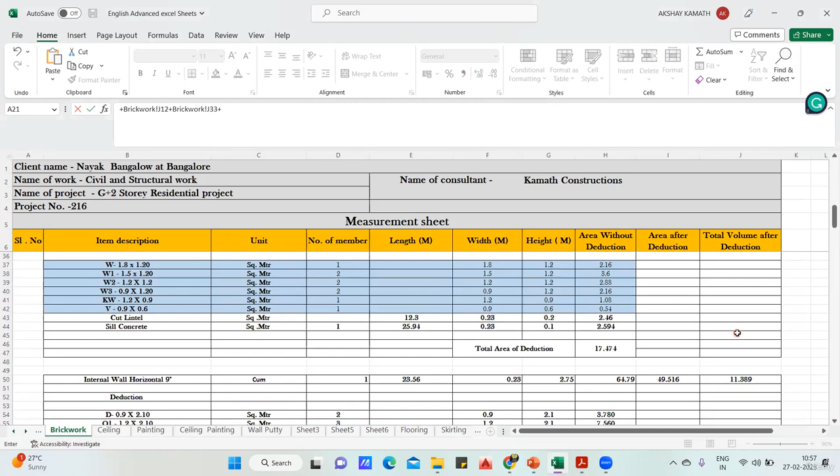Okay, 8.9 plus this one plus this one plus this one, and so on, plus this one and plus this one. Finish. How much it is? 71.07. I also got 71.07.

So one question may come in your mind. Sir, whatever you took is correct, sir. But what happened, sir? When you came here, here we have two things. One is 9-inch wall. The other one we have is a 4.5-inch wall. So this is my 4.5-inch, this one. So 4.5 inch we take in terms of area, not the cubic meter. I agree with that. But since I'm doing a material estimate, that all doesn't matter to me.

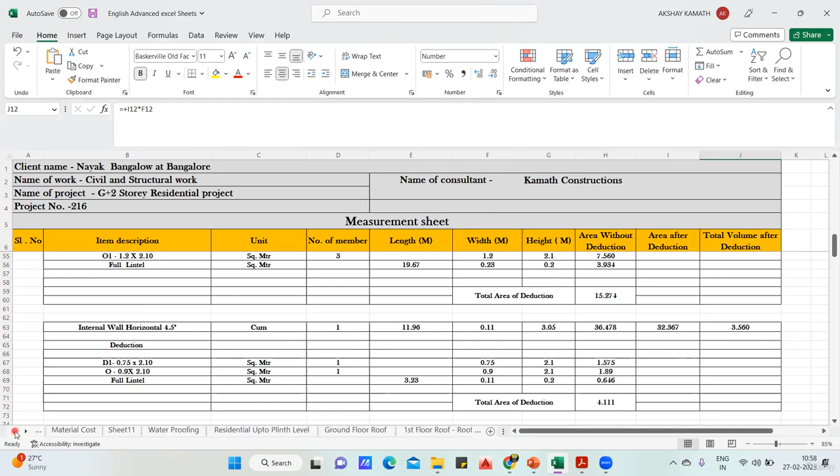If you're so desperate, sir, I want to do according to that, come here. You make two categories here. Okay. I'll not stop you. Masonry work, you make 1:6. That is for your outside masonry work, that is your 9-inch masonry wall. Then make another, come here, say control and plus, another one you have to add, write masonry wall, again write 1:4 ratio and write 4.5 inch. According to that you find a quantity and you can do it.

But again, ultimately I want to check the cost that is going to come. I'm not here making a complete detailed estimate and all. So that is why I've taken it together. Okay, very clear. Fine. Again, don't ask me why you've not taken it. I told you the explanation for that. Good. So quantity I got. Now masonry I did.

Now I'll go with outside plastering. But in plastering, I've divided that. I've taken outside plastering separately because the ratio is different. 1:4 and it is 20 mm. Inside plastering it is 1:6 and it is 12 mm. Ceiling plastering it is 1:3 and 6 mm. So I've taken it separately. So I'll go to the plastering part now. So plastering is here.

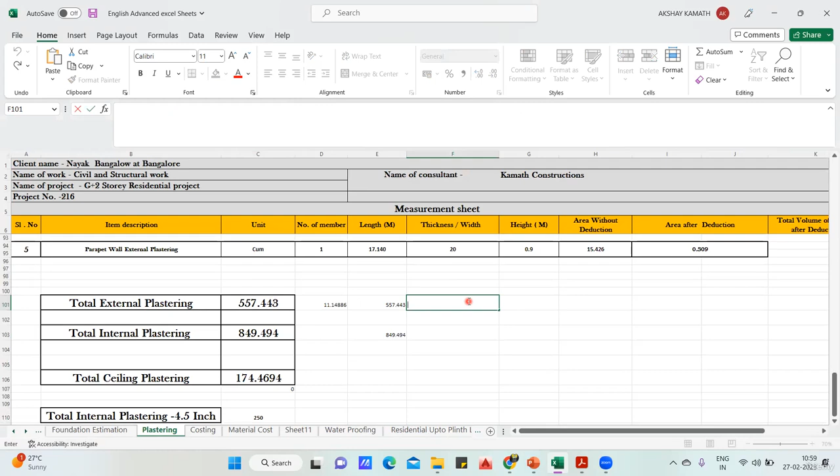So plastering, you come here. Already I've done this, else you can do it. I'll tell you how it has to be done. First, we'll find all the total external plastering. So I'll say plus. So this is my external plastering. You have to take the area, not the volume. For plastering, I want area. You can take volume also, but instead of that, I'll take area first. This area I'll take plus.

Then this is internal plastering. I don't want it. I want only external plastering. And parapet wall is also external plastering. Take the area. Finish. So total external plastering is 557 square meters. So come to the costing part, that is material costing, and write 557. That is the input I've done.

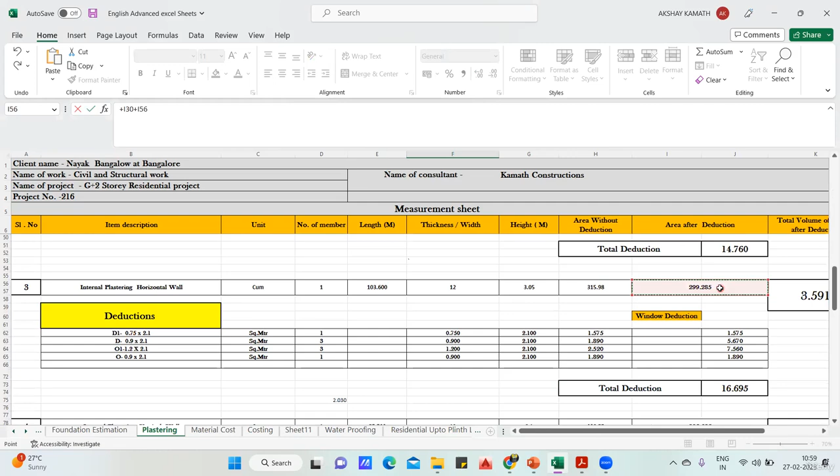Now come to the inside plastering. Again, inside plastering, I'll do it here. Inside plastering plus. So this is my inside plastering area, 224, plus internal plastering horizontal wall, this is 299, plus internal plastering vertical wall, this one, then finish. That's it. Only three quantities. How much you got? 849. I've written 849. Simple. Now come to the ceiling plastering. So for the ceiling plastering, what will you do?

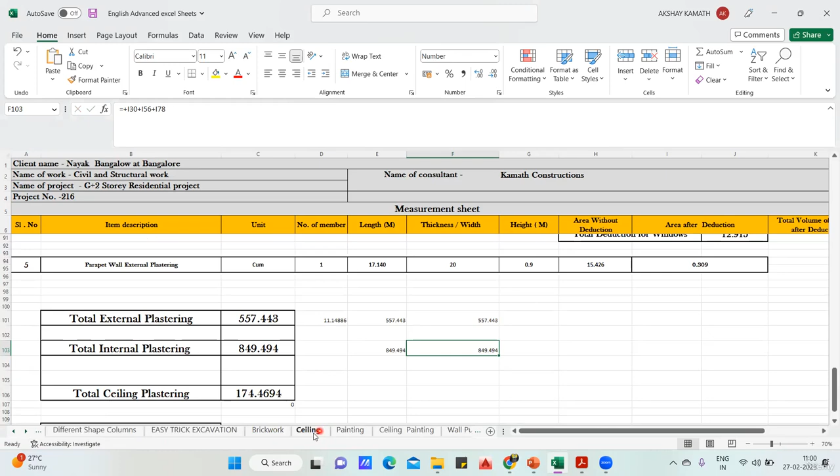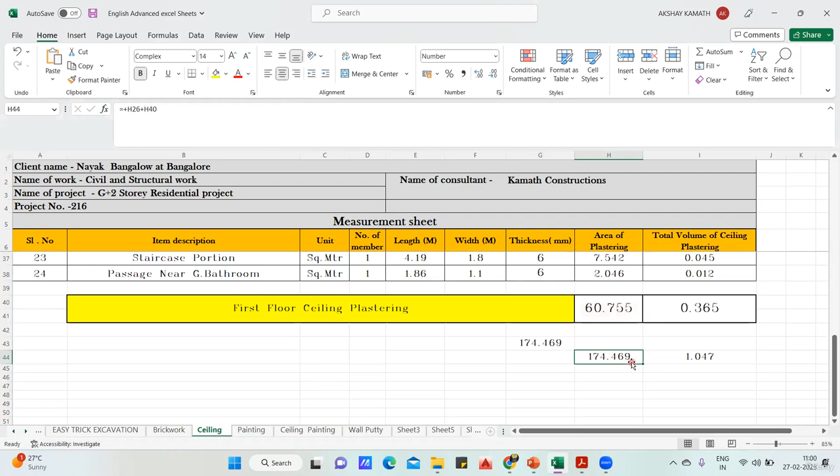You have to go to the ceiling area. Okay, my ceiling area. So in ceiling, I have ceiling plastering. How much is it? In ground floor, you require 113.715 square meter, and first floor, you require 60. Altogether, 60 plus 113 will give me 174.469. Same thing I've done here in the material cost. You can see where it is, 174. Finish.

Next, come to wall putty. In the wall putty, I've added exterior plus interior plus ceiling all together in one row. Else you can do separately, like wall putty exterior, wall putty interior, wall putty ceiling. But anyhow, I want the total quantity. That is why I've taken 1581. Very simple: if you add 557 plus 849 plus 174, you'll get 1581.

Because wherever you are going to do the plastering, there only you are going to do the wall putty. Outside plastering, exterior wall putty I'll put. Inside plastering, inside wall putty I'll put. Ceiling plastering, ceiling putty I'm going to put. Wherever plastering has happened, there only putty will happen. Add all the three things. Else go to the wall putty sheet and take all the values from there.

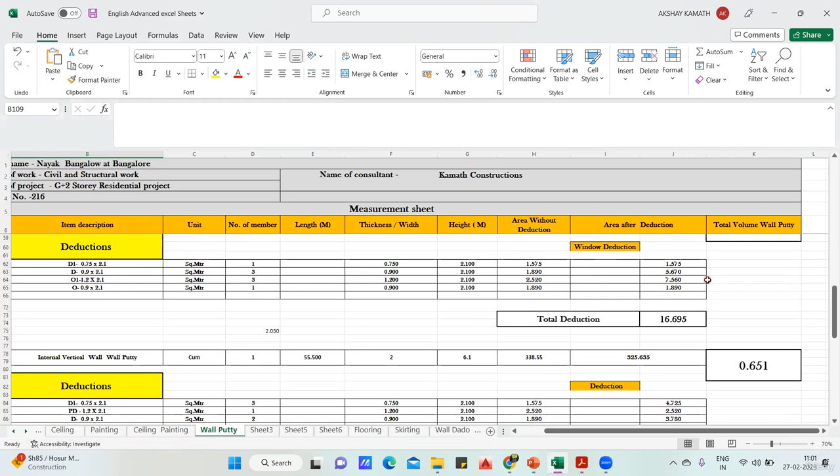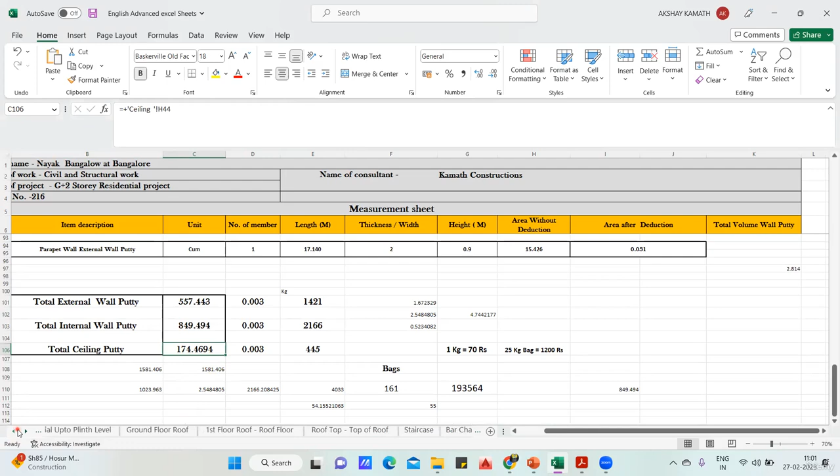If you want, I'll come to the wall putty. You see here everything I've done. Wall putty, whatever you did in plastering, same thing you'll get. Total external wall putty is 557, internal is 849, and ceiling is 174. If you add all three quantities you'll get 1581. Same thing I've done here. Now painting also same thing. Wherever you do plastering and wall putty, there only you do painting. So painting also 1581.

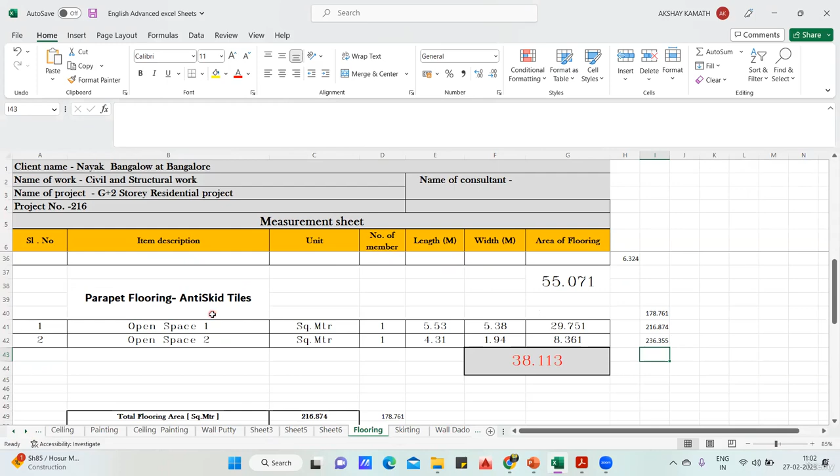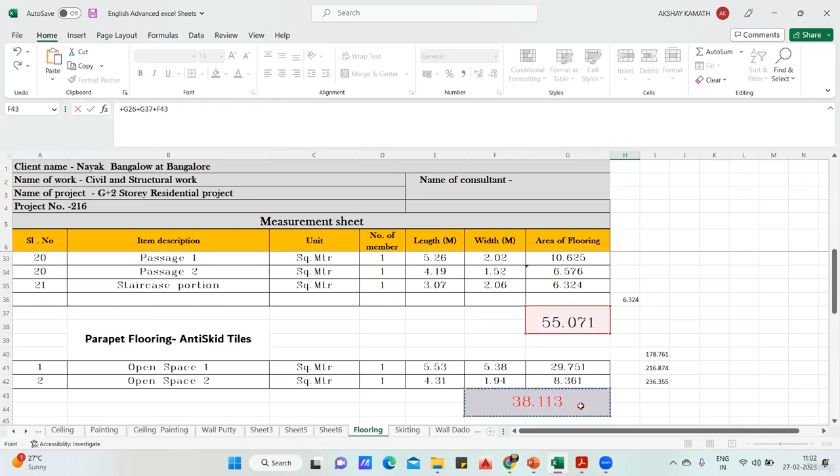Now come to the flooring tiles. Come to the flooring area, that is tiles. I'll take everything. Even though this is anti-skid tiles, I will not do a separate row for that. I'll consider I'm putting tiles everywhere. I just want the flooring area. So 123 plus 55 plus 38. This will be 216 square meter of flooring work.

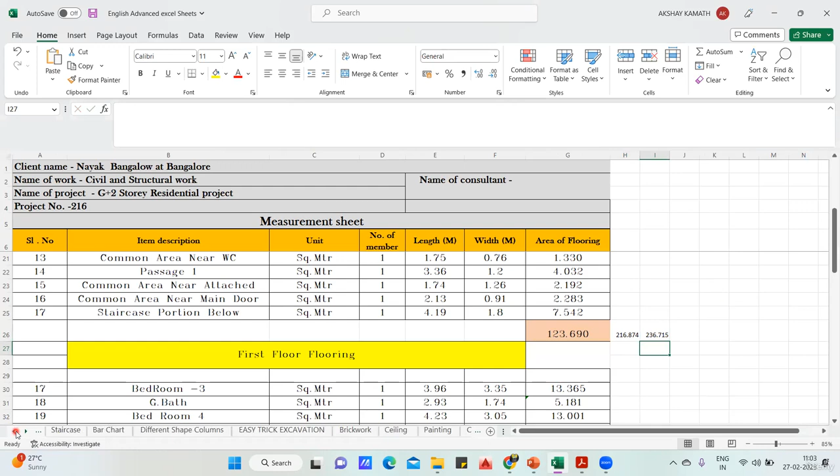So 19.841 square meter plus 216. Together you are going to get 236 square meter of flooring work, including the skirting. So 236 is the value that you want. I've written 236 here.

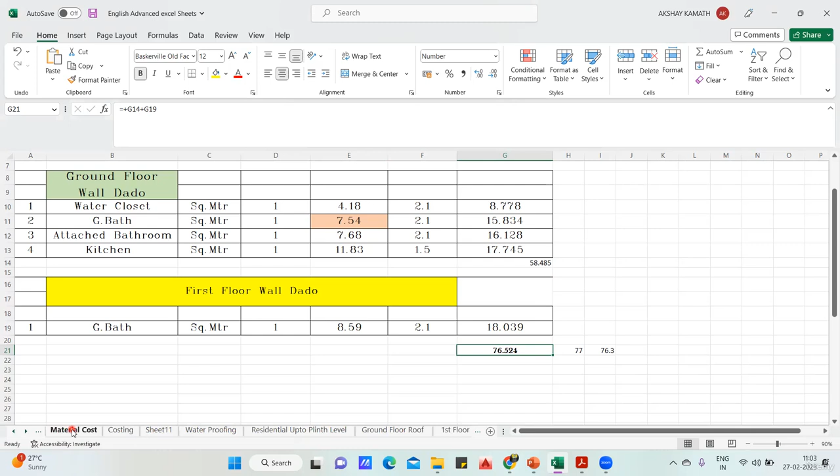Similarly, come to the wall dado. Wall dado you can also add in tiles, no problem, but I'm taking it separately. If you want, you can mix it up. Wall dado, I'm getting 76. That is 18 and 58. This will be 76.524 square meter. So come here. I've written 76.524 square meter. Got it? This much is understood.

Now come to the cement sand calculation. How are we going to do the cement calculation? This is the total volume I have for the brickwork. And I know that for 1 cubic meter of brickwork, I require 0.2305 cubic meter of mortar. So if I multiply both, I'll get the mortar volume that is required.

But I want to find the cement. How do you find it? We know that for 1 cubic meter, almost 5.9 bags of cement are required if the masonry work ratio is 1:6. This is a thumb rule and we have already seen that.

I'll show you it once again. For 1 cubic meter, if I require 5.9 bags, I have 16 cubic meter. So 16 into 5.9 will give me 96.65. I've written 97 here. Simple.

Now you'll ask me where I got that. This is the sheet I had prepared for 1:6 ratio. I require 5.9 cement bag and 43.58 CFT of sand. Remember 43.58 for the sand, I'll use it. So I've written 97 here.

Once this is done, for outside plastering I'll come later. Now I'll go with the sand. Come to the sand part. So again, sand, how are we supposed to do it? Same thing for sand.

So sand, what we are going to do? What I have done is 71.07, you multiply this by 0.2305. This is the total mortar volume that you are going to get.

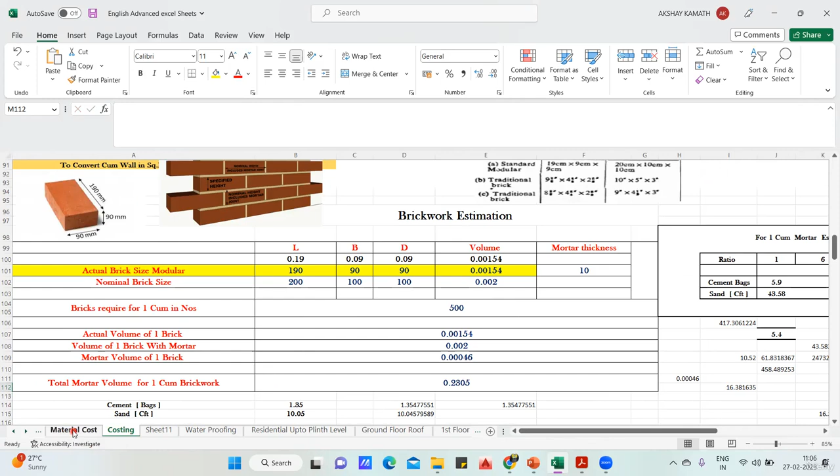Now come to the bricks. Bricks also very simple logic. From the costing part, for 1 cubic meter of work, brick required is 500. How much cubic meter do I have? 71.07 cubic meter I have. If I multiply this by 500, I'll get the total bricks, which is 35,536 bricks required. Simple.

So masonry work estimate is done. Now come to the outside plastering, which is 1:4. The quantity is 557, this is in square meter. You want to find the plastering quantity.

That means you require mortar quantity. So how we are going to do it? Total area, if I multiply by the thickness, I'll get the volume. Thickness for outside plastering is 20 mm, so it will be 0.02. This much you understood.

Next, what are we supposed to do? I'll do up to here, it is 11.14. After that, come back to this. So here you have this thing, what is that? Yeah, 1:4. So what is the ratio? The ratio is 1:4.

For 1:4, what is the cement bag you're getting? Cement bag you require is 8.2, sand is 40.68 CFT. So cement is 8.2, for 1 cubic meter of 1:4 ratio. You just multiply this by 8.2. So this answer you multiply by 8.2. Okay, finish, you got the answer.

Where is the answer? Yeah, 91.348. I got 91, let us say 92 bags. If you round it up, it will come to 92 bags. Simple, good. Now similarly for inside plastering.

I'll finish the sand part also. Now come to the sand, what you're going to do? Same thing, come here. Sand you require 40.68. So what you'll do, nothing. 557 multiply by...

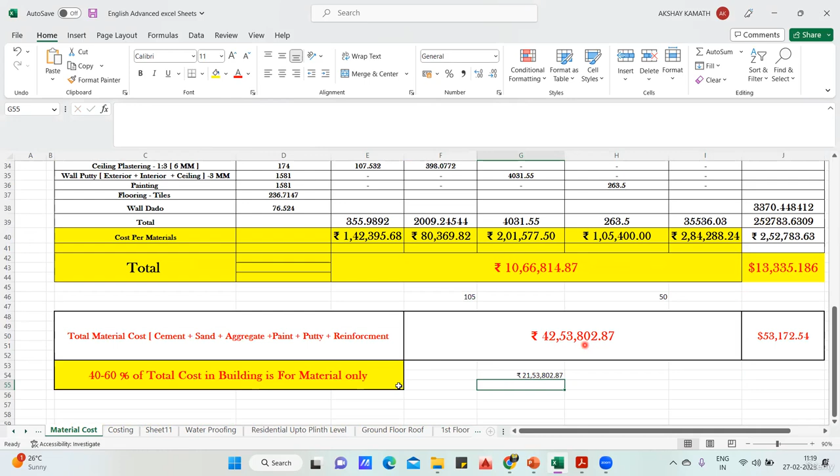But so far I did not add the reinforcement. Reinforcement also will come in the cost. Here we had done the reinforcement - for reinforcement in the BBS, we found that 28 tons of steel is required. This you got from BBS, don't ask me from where I took this - from BBS we have seen that, and also in BOQ, if you want, I'll show you.

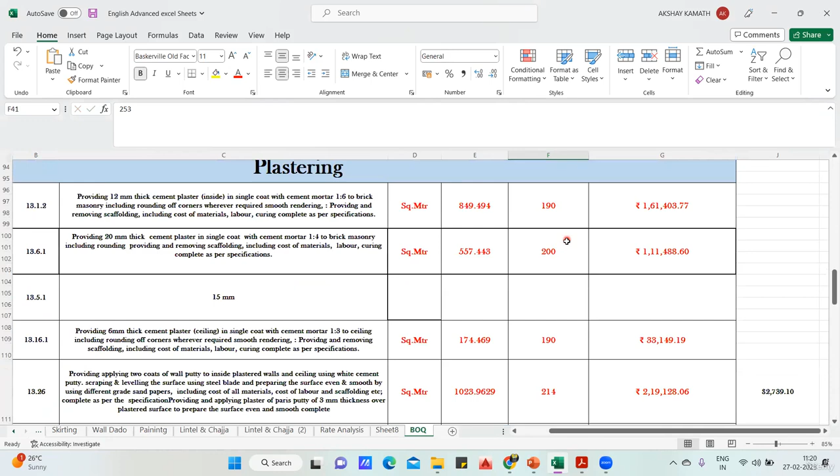So if you come to the BOQ, check here - what are the tiles, what is the reinforcement quantity we took. Reinforcement we took 28 tons.

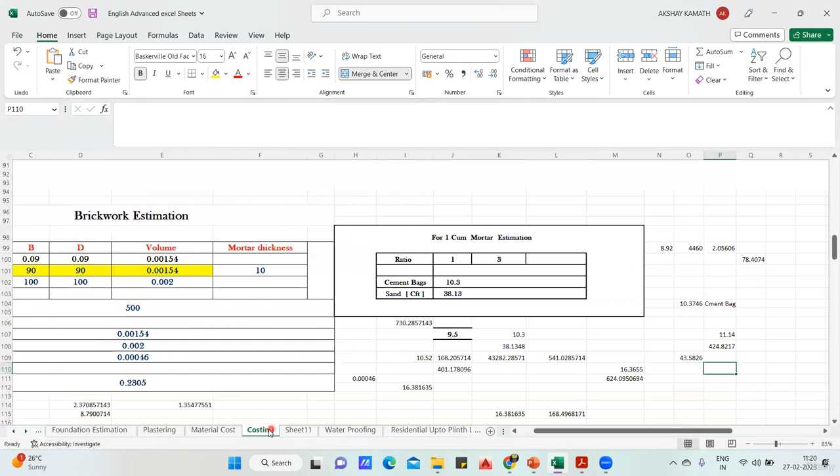Okay, fine. Now if you go to the market for reinforcement, you get it priced per kg. If you check today's price, I'll show you on the internet. Steel price per kg list today - if you go in the market to buy steel from any company, let's say JSW Steel, if I'm bringing an 8mm steel, it will cost me 70.98 rupees per kg.

For 16 dia it is 68, 20 dia it is 68, 25 dia it is 68. Now on average I'm going to take this, because we have all sorts of steel with us - 8, 10, 12, 16 and all - I'll not bifurcate in that. So looking at the entire chart, the minimum is somewhere around 66 and maximum close to 74. On average, can I take the steel rate as 70 or 71 rupees? Whichever you want, take 70 rupees.

So what I have done is multiply this by 70. Steel I'll do here - 28 tons, so put it in kg. 28 tons multiplied by 1000 will give me kg. From tons to kg, I'll multiply by 1000. And now I'll multiply this by how much? I'll go with 71 rupees per kg.

Okay, so here I've taken 75 in my calculation. I'll take 75 only, no problem. On average, I'll say 75 rupees per kg. So now add everything, you'll get the total cost. That is, already we got 21 lakh here, because almost 21 lakh has gone even in this. I'll do it here: 21 lakh plus 21 lakh, how much? 42 lakh 53,000. Same thing you can see here.

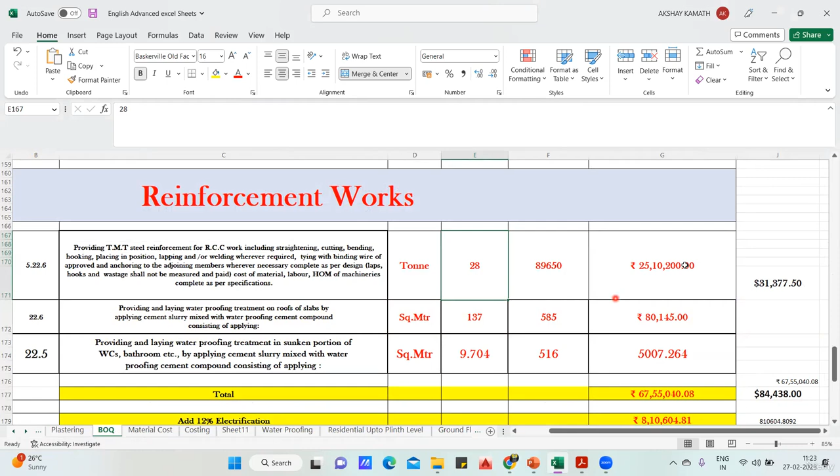According to the BOQ, what was the total cost of your project? Can you tell me? So according to the BOQ, it is written here. The total cost was how much? 87 lakh 47,776. I'll write it: 87 lakh 47,776 rupees, isn't it? This is the total cost, including the labor, contractor profit and all. Okay, that is a total.

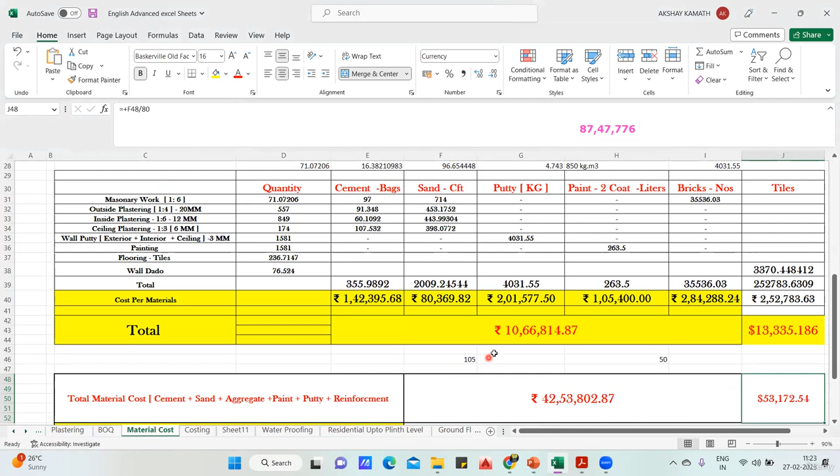Out of that, only the material cost has gone to 42 lakh 53,802. So what is the conclusion that you can draw? That means almost 50%, can I say? 42 plus 42 will come out to be 84, no? 84 lakhs. So almost 40 to 60% of the total cost in building is only for the material.

Remaining 50% is the contractor profit, your labor, miscellaneous, electrical, plumbing and all. So with this, I can conclude that whenever you take up any construction project, almost you can say 50% of the cost has gone only in procuring the material. Only in the cost of material it has gone. This much conclusion you can draw from here.

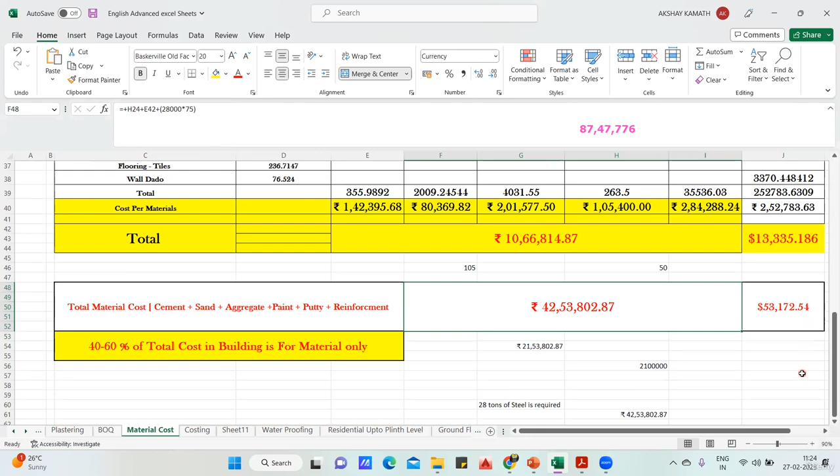So with this, we can get an idea. So if I take up any project, 50% has gone completely in the material itself, right? So that is the main intention of preparing this particular abstract sheet, or let us say material sheet, so that we get a cost, how much amount of money I need to put only in the material.

Okay, great. I hope up to here you can prepare the Excel sheets. Try to prepare the Excel sheets, and also whenever you prepare the Excel sheet, don't just put the formula and all. You just try to see what values you are getting. You get an idea, right? If I have 71 cubic meter of the brickwork, I require almost 35,000 bricks.

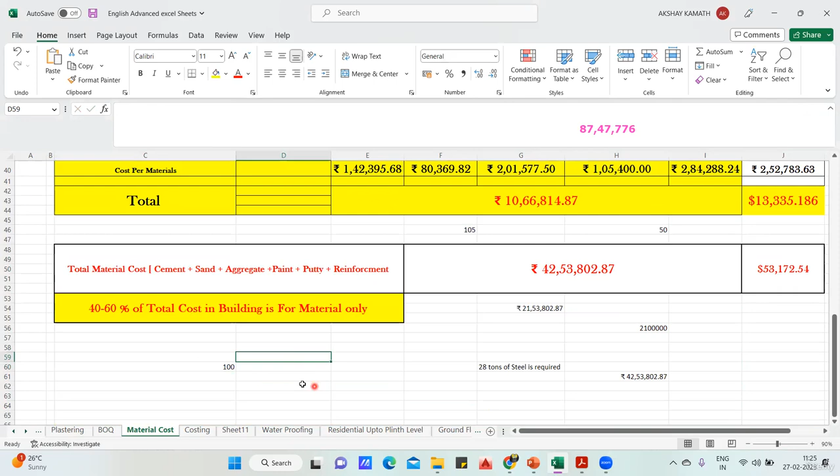For example, tomorrow, let us say you went somewhere, and somebody told you, see, I have 100 cubic meter of the brickwork to be done. Can you tell me how much bricks is required? So based on that, you can multiply, or even with this idea also you can have.

Okay, in my estimate, I had done 557 square meter of the plastering work was supposed to happen outside. So I got 91 bags. Tomorrow you went to some place, somebody asked you, yes, see, I have 1,500 square meter of the plastering work to happen. Can you tell me approximately how much cement bag is required?

Very simple. Now you put your idea. I did calculation for 557, I got 91 bag. If somebody is asking me for 1,500, you multiply, this almost 3 times it has increased. No, so 9 threes are how much? 9 threes are 27. That means you can say roughly 250 to 300 bags of cement is required. Got it? So that is why these values play an important role.

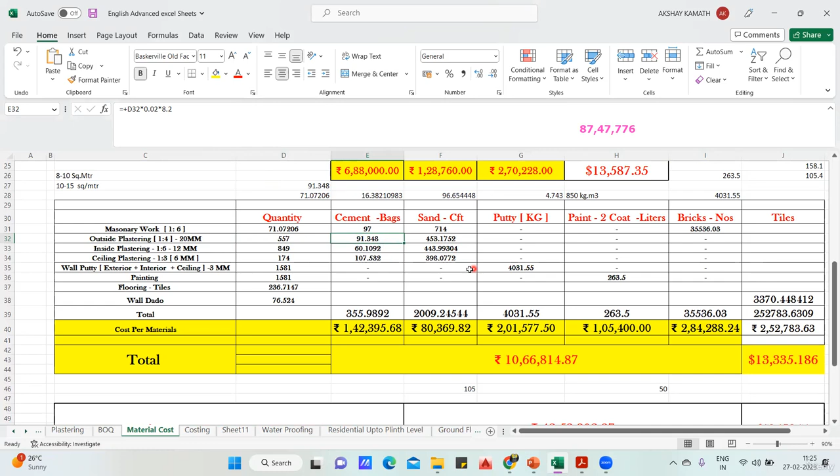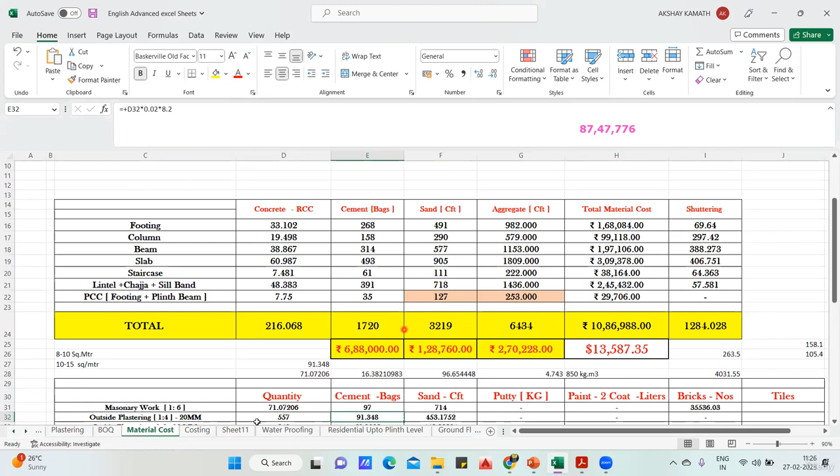So try to keep a separate Excel sheet with you, and try to have a watch on all these figures so that you get an idea. And from this only you can create your own thumb rules. Thumb rules is not that from something we are taking. Thumb rules is only when people gather such data. I have done for one project, right? Tomorrow if I give you 10 projects, and from all the 10 projects, if you can create your own thumb rule, that's how the thumb rules come into existence.